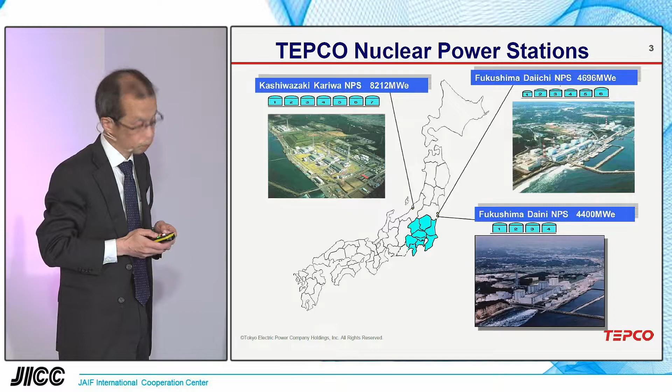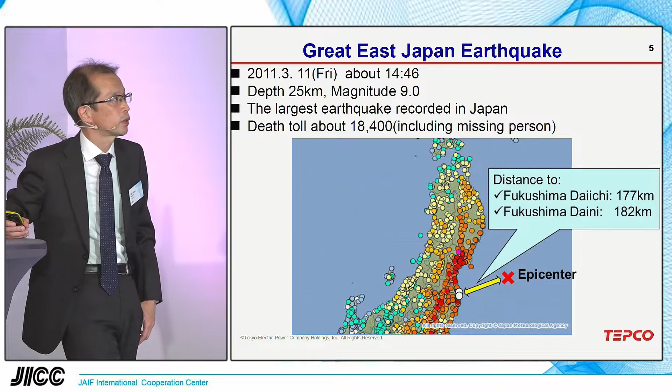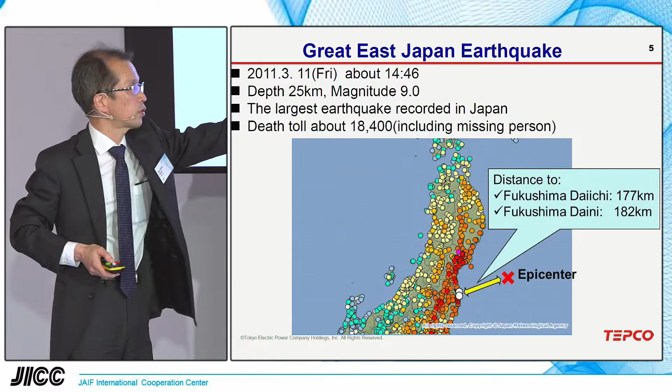And this is the earthquake information, which happened March 11, 2011. It was a very huge earthquake. The magnitude is 9.0, and we have never experienced something like that. And the death toll is right here. It's 18,400, including missing persons. But now the number has changed a little bit. It's around 19,000 or something. And this is the epicenter of the earthquake, and the distance to Fukushima Daiichi is 177 kilometers.

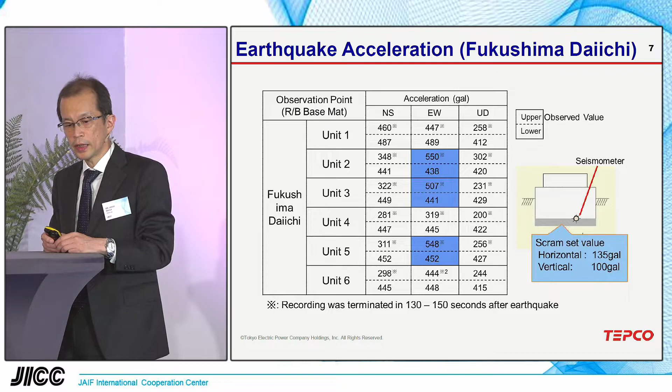Okay, so first I would like to talk about the impact caused by this earthquake. Some people say the Fukushima Daiichi accident was caused by the earthquake, but it's not really true. It was caused by the tsunami. I will prove it one by one right now. And this one shows the acceleration caused by that earthquake. At each level, we have two values in each cell. The upper side is the observed value, and the lower side is the design value. And if you take a look at those three areas, the observed value exceeds the design value, so it looks like a big deal.

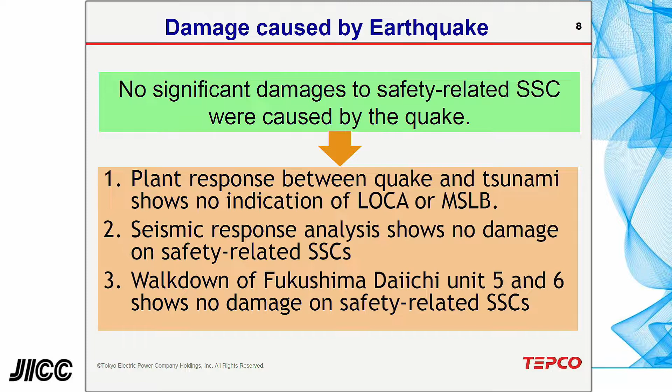And however, this is our position. No significant damage to the safety-related SSC, system, structure, and component, was caused by the earthquake. We have three reasons for that. The first one is the plant response between the earthquake and the tsunami shows no indication of any significant event, like a loss of coolant accident or main steam line break.

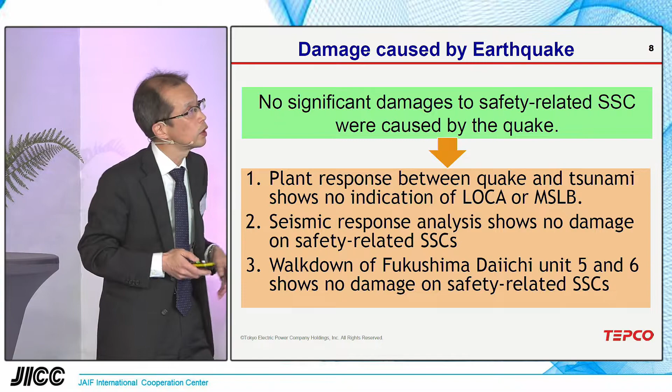And the second one is a seismic response analysis shows no damage on safety-related SSCs. The third one is a walk down of Fukushima Daiichi Unit 5 and 6 shows no damage on safety-related SSC. Why is it Unit 5 and 6? Because Unit 1 through 4 has been severely damaged, and because of the high radiation we cannot really go inside of it so easily. And I will show what we have found by that walk down.

And this is an example of seismic response analysis. We have picked up some of the Unit 1, 2, 3 safety-related systems, like here. On the left-hand side, we have the calculated value, where we have the input of the actual seismic acceleration into the system, and we get the result. On the right-hand side, you see the assessment criteria value. And as you can see, in all areas, at least for this estimate, the assessment criteria value is more than the calculated value.

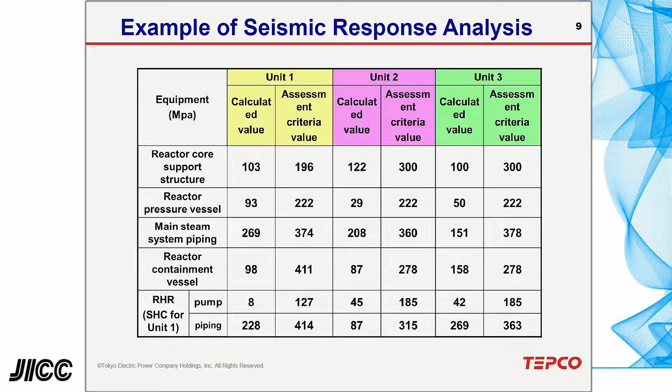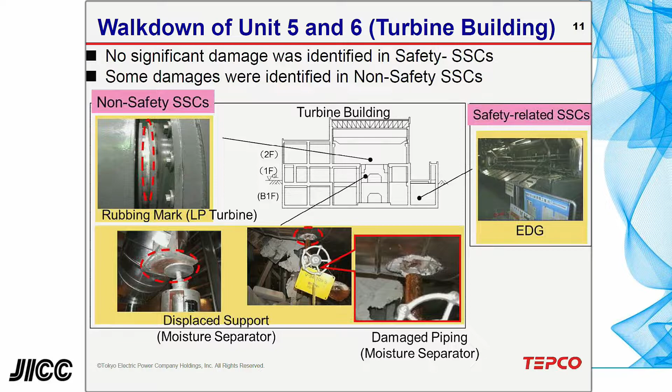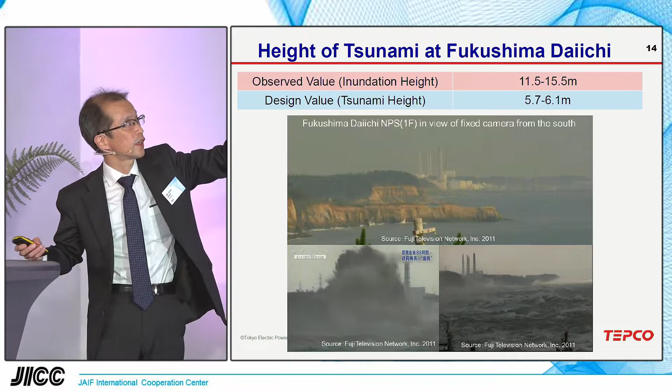Please be careful, this 11.5 to 15.5 meters is not really the height of the tsunami, because we have a tsunami height meter offshore, but it went over scale. We do not have the exact value of the height of the tsunami. This was the inundation height. If you have flooding on your site, you will see the mark on the outer wall of the reactor building or turbine building. So this is the inundation height, the flooded height, I would say.

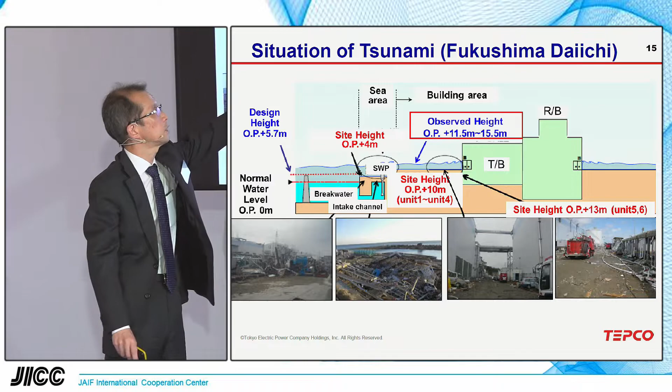So this is how the tsunami caused damage. You can see the seawater pump has been completely damaged because it is located very close to the seashore area. And also, this is a sectional diagram. As you can see, all the site, even the backside of the reactor building, has been completely flooded. So as I explained, 11.5 to 15.5 meters is this height. It's not really the actual height of the tsunami, but again, the inundation height.

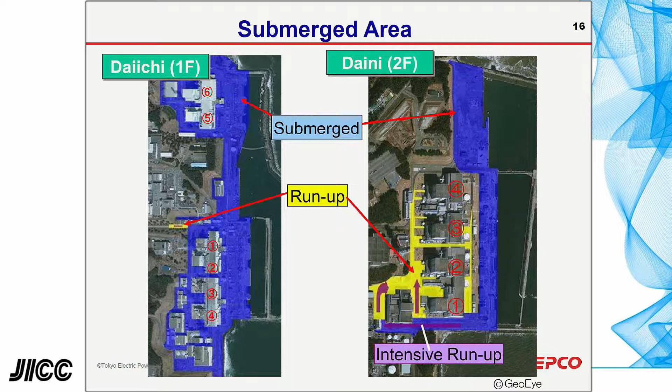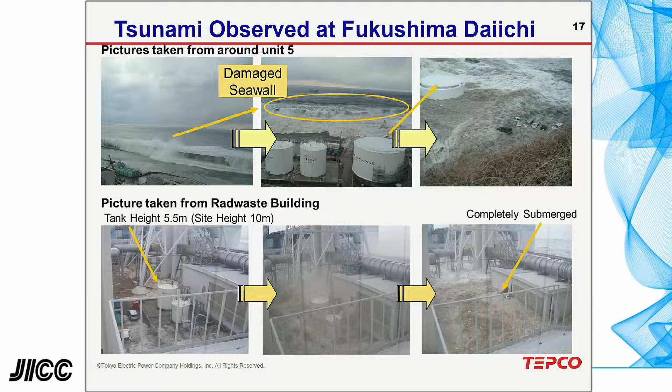Okay, this is another picture showing how the tsunami attacked our site, and you can see the seawall has been damaged and overflooded. And this is an interesting picture, taken from the Radwaste building in a high elevation area. The site elevation is 10 meters. And the height of this tank is 5.5 meters. So as you can see on the right-hand side picture, it has been completely submerged. So that means we have experienced at least 15.5 meters inundation.

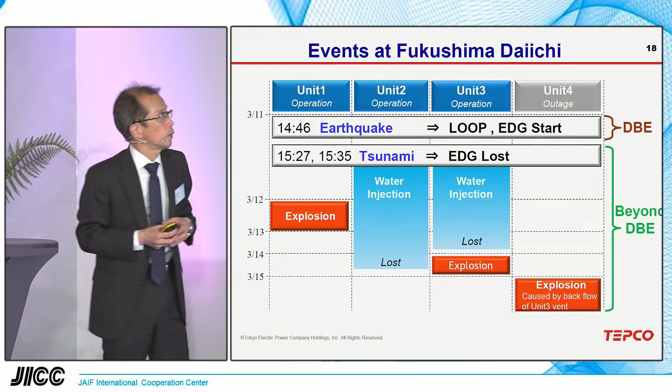And I will explain more detail later. The first critical event was the hydrogen explosion of Unit 1, just within 24 hours since we had the tsunami. And this explosion made accident management quite difficult because of the scattered debris. And also, at Units 3 and 4, we had explosions. And also at Unit 2, we lost the water injection.

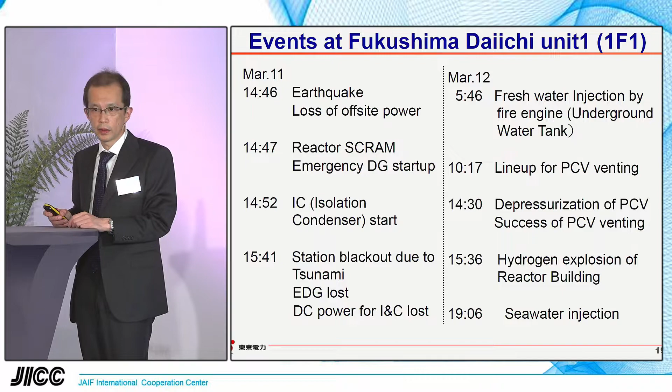Then we realized that the PCV, primary containment vessel, pressure had been elevated. So we were trying to line up PCV venting to protect the integrity of the containment system. Then after 4.5 hours, we recognized there was a depressurization of the primary containment system. That means success of the PCV venting. But right after that, just 1 hour after, we saw the hydrogen explosion at the reactor building.

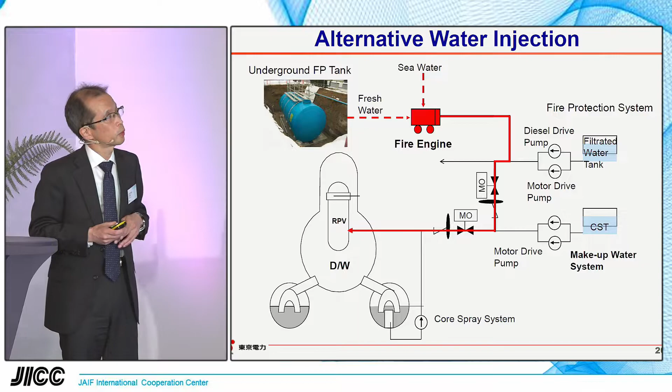So this is the water injection. We improvised this action. Usually if something happens, you have the ECCS, you have the pump, and you have the water sources. But this time, it's not available because we do not have power. So what we relied on is a fire engine, this car. This is basically for fire events, but we improvised with it. We connected the underground fire protection tank to the fire engine, and then tried to put the water in this existing line.

But considering the amount of water we have lost from the inside of the RPV, the amount is not enough. The volume is not really enough for this operation.

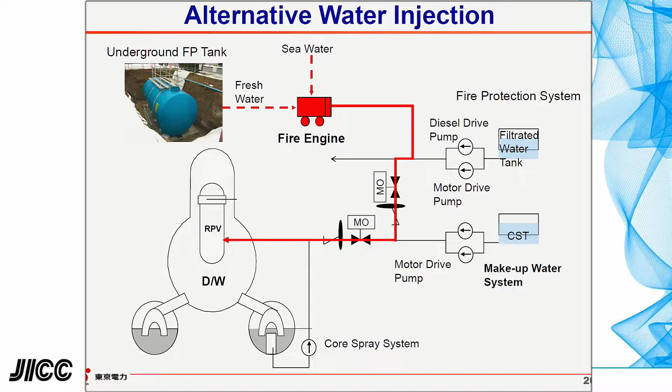And this one is for the PCV venting. We realized the internal pressure of the primary containment vessel is elevating. And if it is left unattended, it may rupture. I mean, it may lose the integrity of the containment. So that will lead to a catastrophe. So we tried to conduct the PCV venting operation.

Why are we doing this? Because if we could successfully make this line available, we have a significant amount of water in the suppression pool. So you can scrub the vented gas through this water. So some of the radioactivity, especially the particulate material, can be reduced through this water. At the same time, by depressurizing with this operation, we can still protect the integrity of the primary containment vessel.

However, we had difficulty because usually these two valves are closed. Under the normal situation, we can operate them from the main control room, a very quick action. But at that time, it was not available because the power was lost. So we sent a pair of operators into the field to try to open the valve manually. The first two operators were actually the shift supervisor and relatively senior people, because we could not let the young people go in the field since we had little knowledge about the radiation level there. So we sent two people, and they came back and successfully opened the valve.

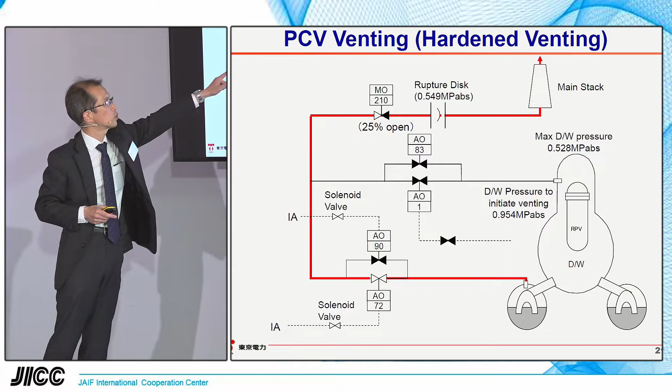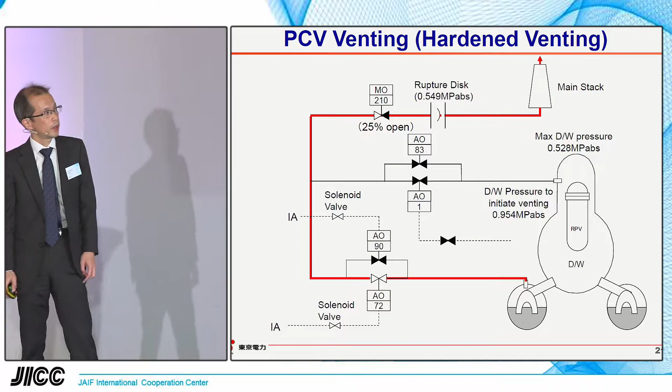So we changed the strategy. We installed an air cylinder outside of the reactor building and connected it to this one. So we could successfully open this valve from outside the reactor building. Then we realized the pressure had decreased inside the primary containment vessel, and we recognized that this operation had been successful. However, a hydrogen explosion occurred at that time.

This schematic shows how the hydrogen explosion occurred. On the surface of the PCV, we have numerous penetrations like electric cables, and also the equipment hatch. They are usually sealed by special material, but the sealing capability was compromised because of high temperature. The hydrogen was generated inside the RPV and leaked out of the PCV, and hydrogen is very light, so it naturally goes up to the high elevation. So it accumulated on top of the reactor building operating floor, and finally it exploded.

Excuse me. Yes. Can you show by hand, because the laser is not visible on the screen? Oh, really? Okay, I'll try. Thank you.

Okay, those are the penetrations, and this is the equipment hatch. If the hydrogen leaks out like this, it will come up like this. The top floor of the reactor building is called the operating floor or refueling floor, and a significant amount of hydrogen accumulated there, and it ended up with the hydrogen explosion.

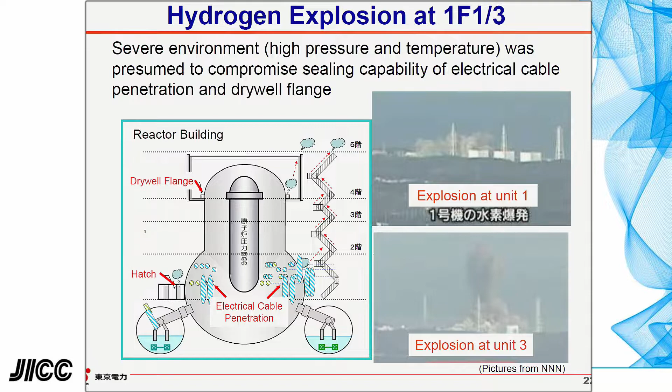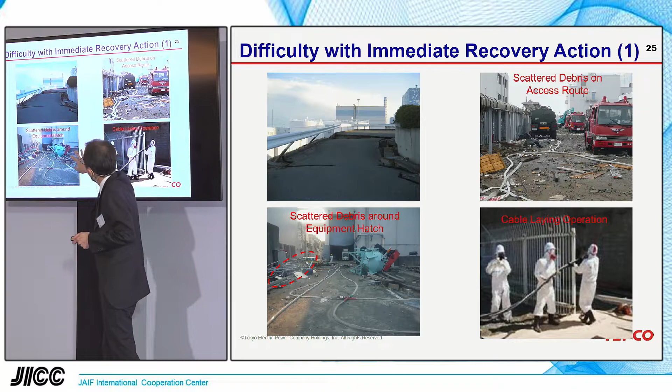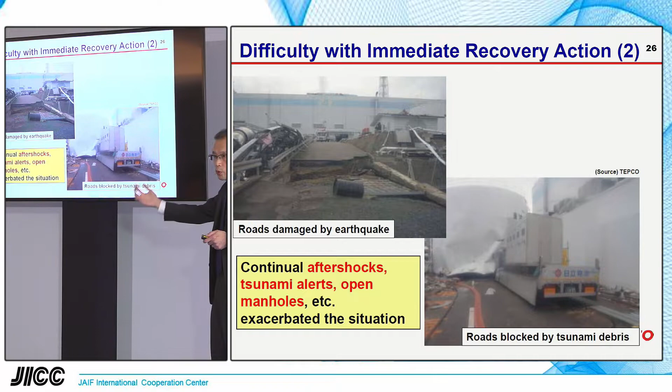There's another picture. You can see this one. This big tank completely blocked the access road. It has been swept away from the seashore area to near the power plant because of the tsunami.

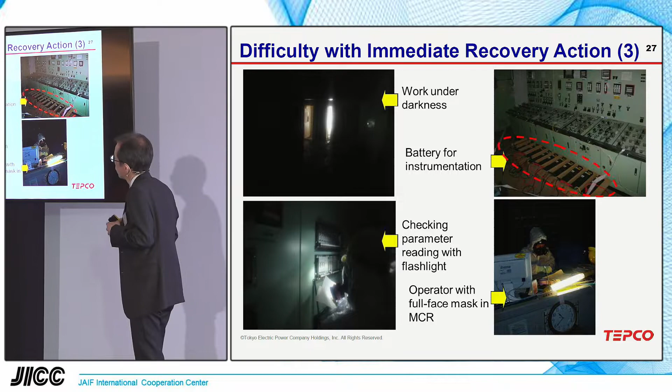So this one shows how difficult it was to understand the situation of the plant in terms of the operators. Right after the tsunami attack, the main control room became completely dark. There was no light. The only light we could rely on was a flashlight, which is equipped in the main control room. So they had difficulty working in the darkness, trying to read some of the parameters, like the water level and the pressure level, by using the flashlight. Because we had lost almost all the power, we could not really read the parameters in the main control room. So we brought in some batteries to connect so that we could see the readings.

And this one shows the operator with a full face mask in the main control room. Of course, operators are very accustomed to wearing the full face mask in the field, but not in the main control room.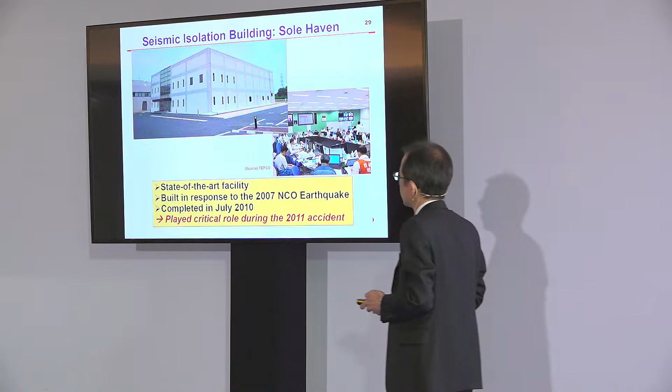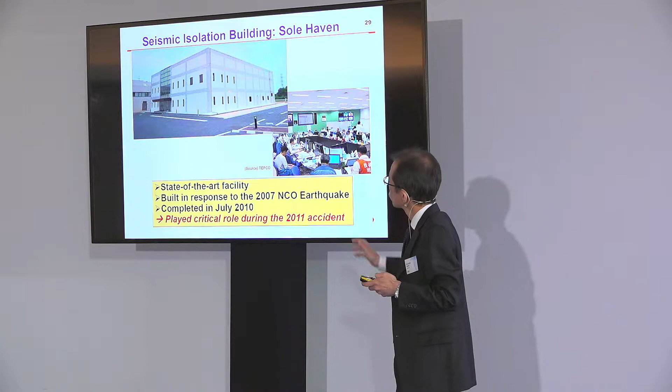So from the lessons learned, we constructed this seismic isolation building, first in Kashiwazaki-Kariwa, which had been directly attacked by the earthquake in 2007. Then we extended our effort to Fukushima Daiichi. So if it had not been for this building, the accident management at the time in Fukushima would have been much more difficult.

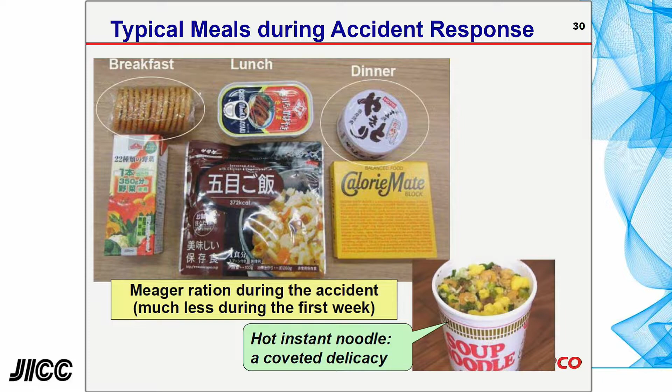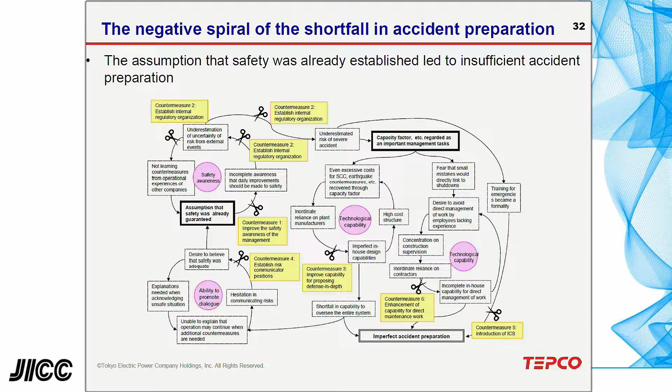We have given so much consideration to earthquakes, but not to tsunami, because everybody knows what is the most important natural hazard. What is that? I think almost all Japanese would answer, it's the earthquake. So from the beginning of the nuclear power introduction, we have given a lot of conservatism, or in other words, safety margin, in every step of the design of our systems, but not for tsunami.

And also, we could not really learn from international operating experience. There was a flooding event, at least we know that there were two, in a French power station, and we had the operational experience data at hand, but we could not really make the best of that operational experience.

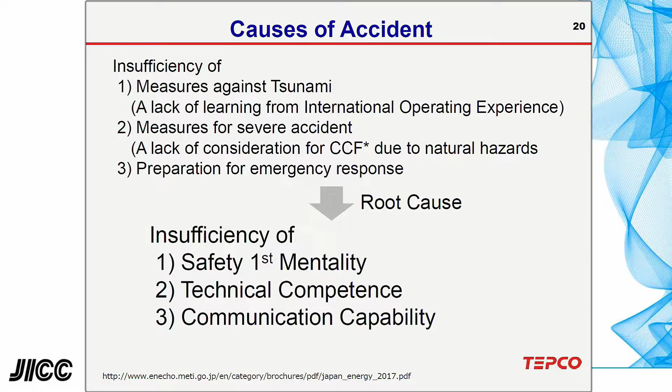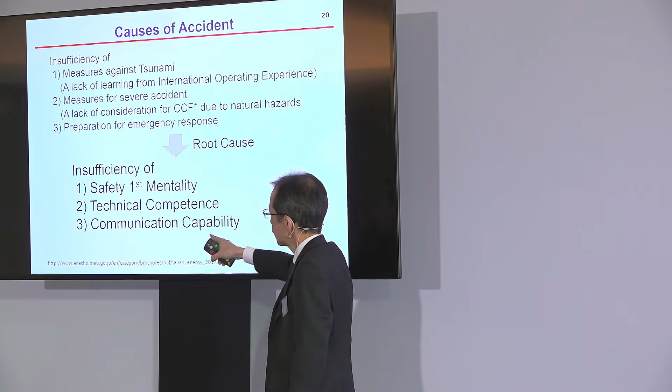So we have analyzed those 3 issues and come up with 3 root causes: first, the insufficiency of the safety first mentality, then technical competence, and the third one is communication capability. And before I go into the detail about each item, I'd like to talk about the redefinition of the vision and mission.

Right after the Fukushima accident, many engineers left TEPCO. They quit their jobs because they could not really see a bright future in TEPCO and nuclear power. So we had to redefine our vision and mission.

So, to keep the Fukushima nuclear accident firmly in mind, we should be safer today than we were yesterday, and safer tomorrow than today. We are committed to become the nuclear power plant operator that keeps creating unparalleled safety. This is our vision. We have 2,700 people in our division, and if you ask any one of them what is your vision, probably some of them cannot recite it as it is, but they can say something like this.

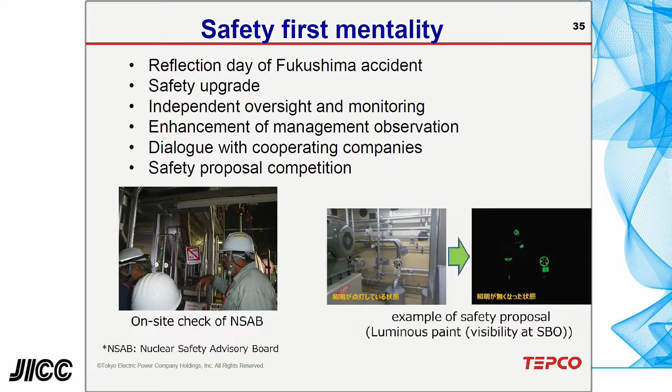As you can see, this is the valve. We have put luminous paint on there. Even if we have complete darkness, we can access this area and easily find out which valve to open. This is, I think, a good idea. We try to continue this effort.

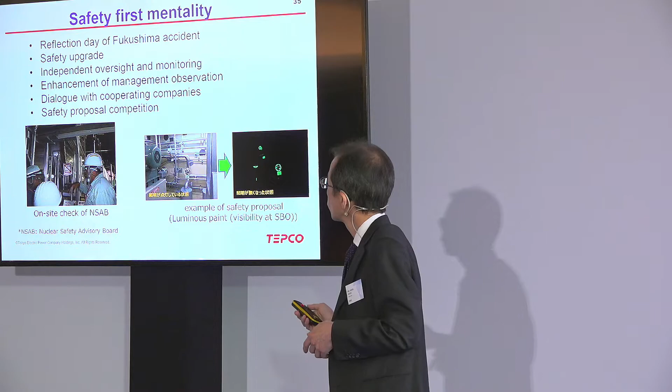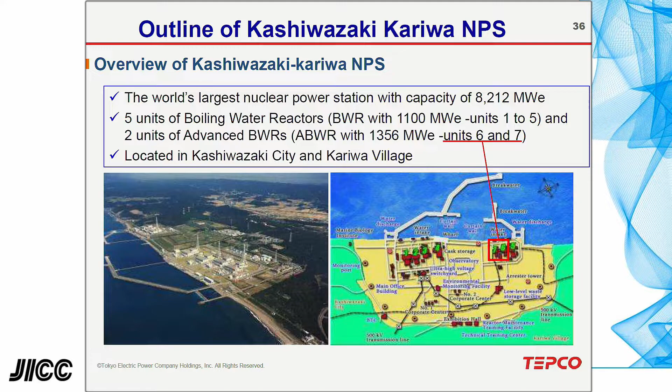And from now on, I would like to explain a little bit about the safety upgrade work conducted for Kashiwazaki-Kariwa. Again, we have 7 units, and 1 through 4 are a little bit far away from units 5, 6, 7. Units 6 and 7 we are trying to restart first. It's still in the middle of the restart activity; we have not restarted yet. Units 6 and 7, in terms of output, are larger than units 1 through 5. And also the reactor types are a bit different. This is the advanced type of BWR.

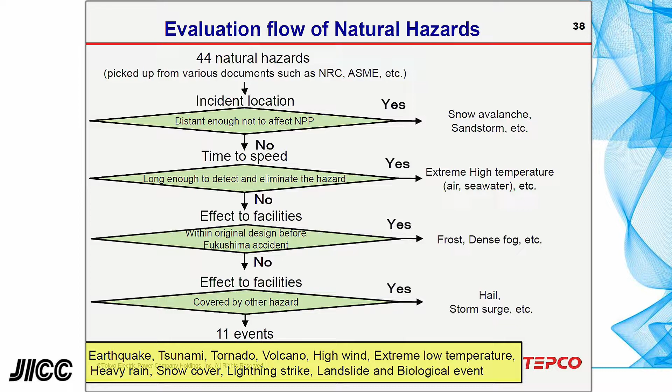What we have done is, first, we have learned a severe lesson, and we first took a look at natural hazards. What kind of natural hazards do we have to consider? We picked up 44 natural hazards from various documents, and we have screened out some of them. For example, in the Kashiwazaki area we have a lot of snow, so snow is a very important consideration. However, we do not have high mountains around the Kashiwazaki-Kariwa area, so we could eliminate the possibility of snow avalanche. After that, 11 events were picked up, so that we have to consider the effect of those natural events on our site.

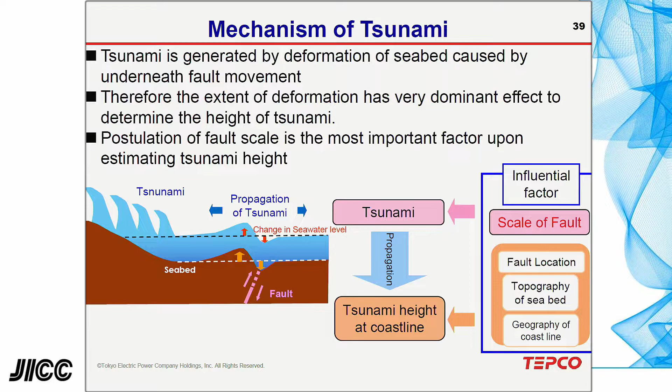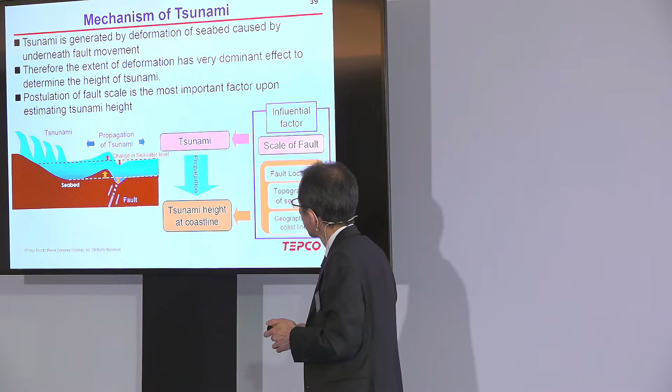This is a simplified diagram for that. And there are 3 influential factors right here: the scale of fault location, the topography of the seabed, and also the geography of the coastline. So based on the new findings, we formulated a design basis tsunami.

Because basically the natural hazard is, how can I say, an act of God, force majeure. Of course, we will make a best effort by collecting the past data and try to reflect on what we are doing right now, but still, there is a chance the actual natural hazard can go beyond our expectation or assumption.

And this is the result for the design basis tsunami. It used to be just 3.3 meters for the Kashiwazaki-Kariwa area. Based on our new findings, it has been elevated to 6 meters, and the run-up height is 8.5 meters. This is the original site elevation for units 6 and 7. It is 12 meters above sea level.

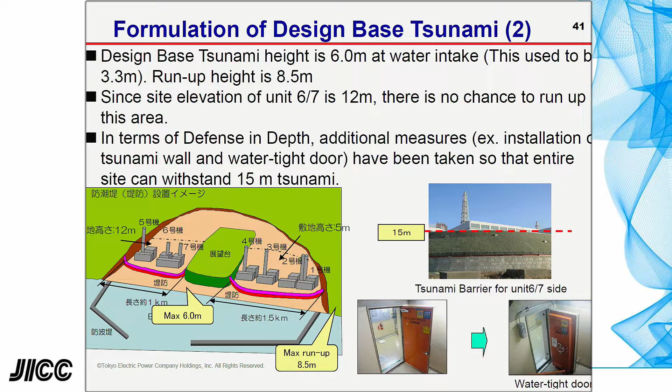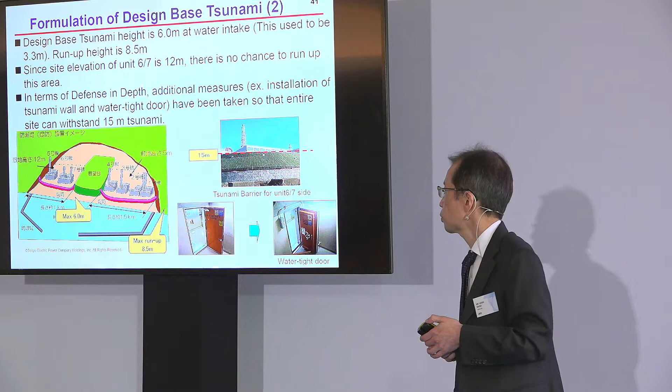And we have added an additional 3 meters of embankment. This is because we would like to be on the safe side against any natural event, especially the tsunami. On top of that, this is a different tsunami wall. From units 1 through 4, the site elevation is a little bit lower, 5 meters. So we have the same idea. We're going to protect our site up to 15 meters. So we built this tsunami wall, made of concrete, 10 meters high.

But this is not the end of the story. In case something happens and this has been flooded, we could protect our reactor building by using the tsunami wall and a tsunami plate. And if it has been flooded, inside the reactor building where we have safety-important components, we have installed watertight doors like this. And still, if flooded, we have a draining system, a pump-up system. The water can be pumped from the room to the outside area.

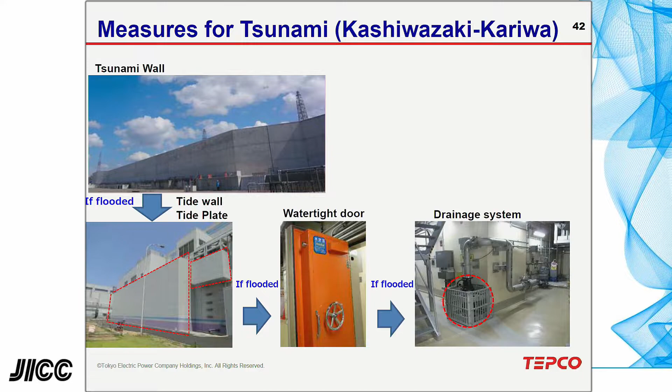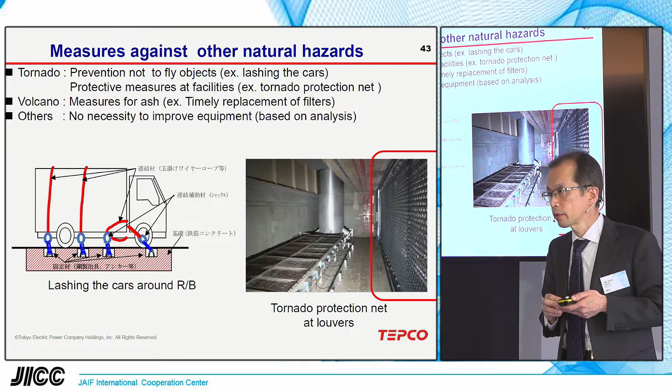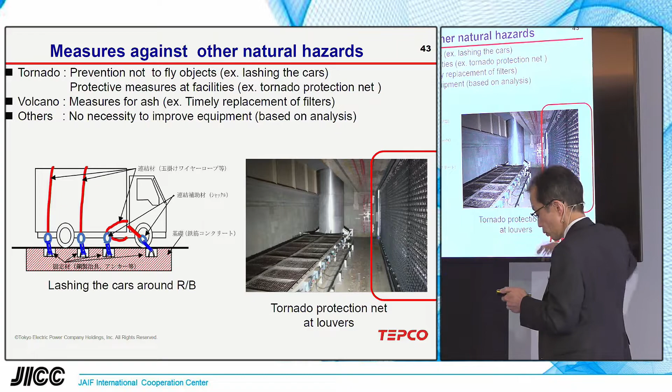And this is another consideration against natural events. For example, this is for the tornado. If we recognize there may be a chance of a tornado, we are supposed to tie down vehicles so that we can prevent them from becoming flying objects and damaging the safety system of the plant. And also we have put protection nets on the safety system. So this is another picture of what we have done.

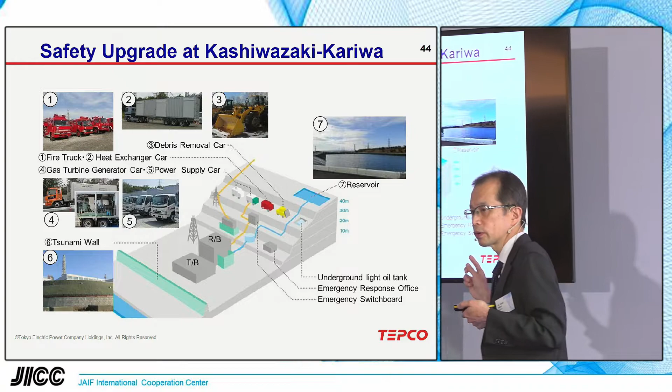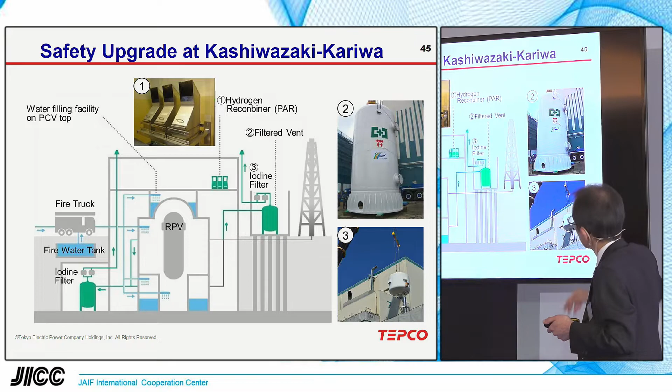The important thing is just having those vehicles is not really enough. The important thing is that our own people, TEPCO's people, can handle it. This is the most important. Okay, this is another safety upgrade at Kashiwazaki-Kariwa. We have installed hydrogen recombiners inside the reactor building, especially on the refueling floor, because that is a place the hydrogen can come up to. And, as I will explain later, a filtered venting system has also been installed.

And again, just installing a new system is not really enough. The important thing is that you have to do it on your own. You have to handle what you have installed. So we are now conducting emergency response training on a regular basis. Before Fukushima, emergency response training was more of a ceremony than actual training. But it's not like that now; it is business as usual.

So all the newly equipped material like the gas turbine generator and fire engine, we make our own people operate in full-fledged fashion. And also sometimes the simulator training is conducted with a limited amount of light so that you can handle the situation in the darkness.

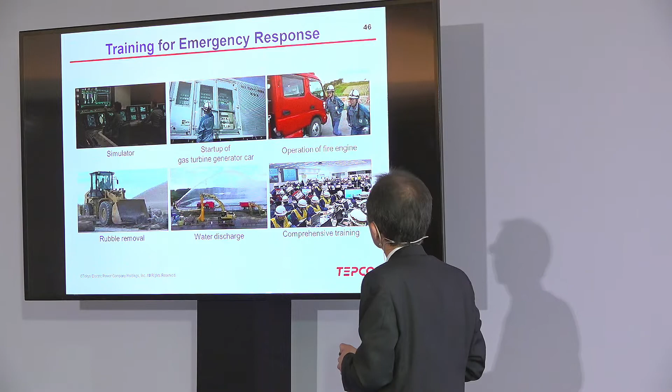Okay, I'd like to move to the second part of that. That's technical competence. What do you mean by that? What we are doing right now is do-it-yourself. Because before Fukushima, let's say we were going to install a new system at our existing site, what we usually did was just pick up the telephone and call the vendor, like Hitachi or Toshiba: we are thinking about this system, why don't you bring us the schematics and some related documents?

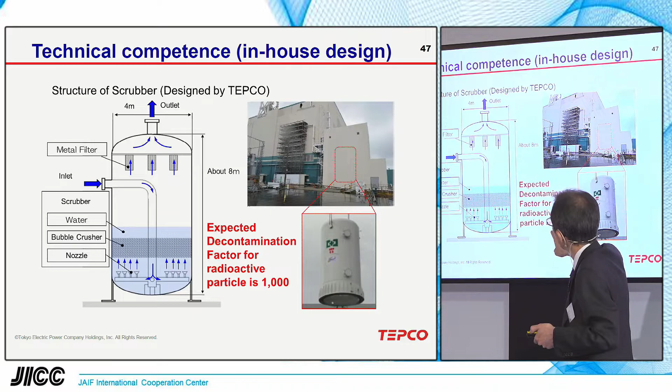Of course, it's an easier way, but with heavy reliance on the vendor, you probably don't understand how the systems work at your plant. So right now, we are trying to enhance in-house design, and this has almost already been installed: a filtered venting system. The vented gas comes here, and after scrubbing in this area, it goes into the environment. We expect the decontamination factor for radioactive particles to be 1,000. This has been designed by TEPCO and manufactured by new guys. New guys means they have never done work associated with nuclear power. We would like to enlarge our area of in-house design.

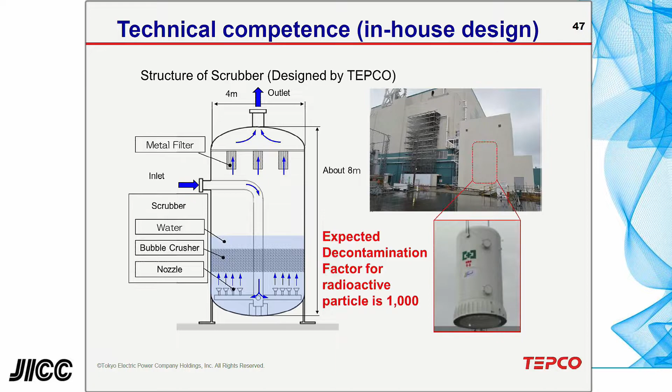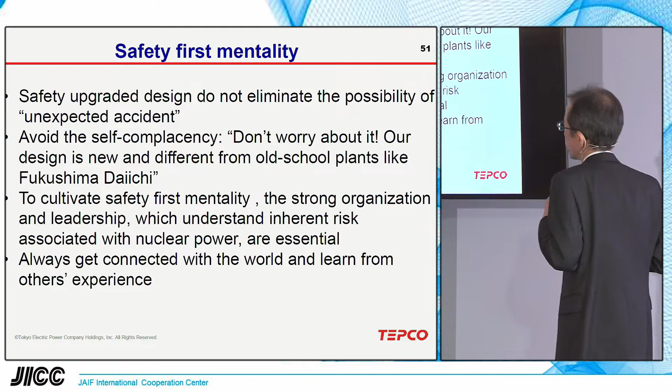For a safety-first mentality, you have to keep in mind that a safety-upgraded design does not really eliminate the possibility of an unexpected accident. Even if you have an advanced design, you cannot really eliminate the possibility. And you have to avoid self-complacency or overconfidence. Self-complacency and overconfidence are, of course, the root cause of the Fukushima Daiichi accident. I thought that our plant was very safe. Looking back on my personal history, what we did was enhance our plant in terms of economy, not in terms of safety. So, don't worry about it, our design is new and different from an old-school reactor like Fukushima Daiichi? Oh, never do that, please.

To cultivate a safety-first mentality, strong organization and leadership which understand the inherent risk associated with nuclear power are pretty much important. And always get connected with the world and learn from others' experience. As I explained, we had full knowledge of the flooding event which occurred in France. Let me pick up another example. There was a document called B5B, compiled by the NRC. Basically, the main purpose of B5B is how to cope with a terrorist attack. But inside, the document is not so complicated. It provides mobile equipment, water sources, and also how to recover power.

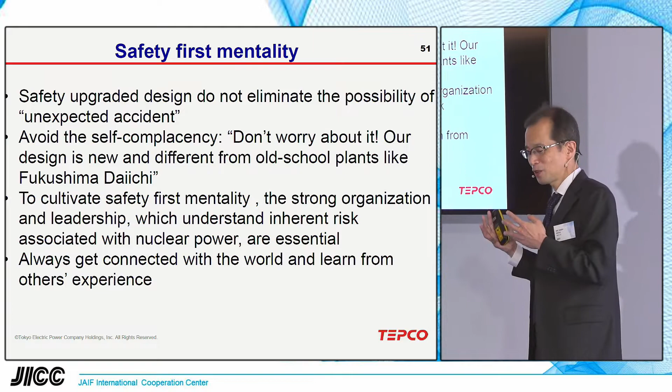In the United States, we have a local branch, the Washington office of TEPCO, and many people visited the United States and sometimes met with NRC officials, but we could not really learn from the B5B document.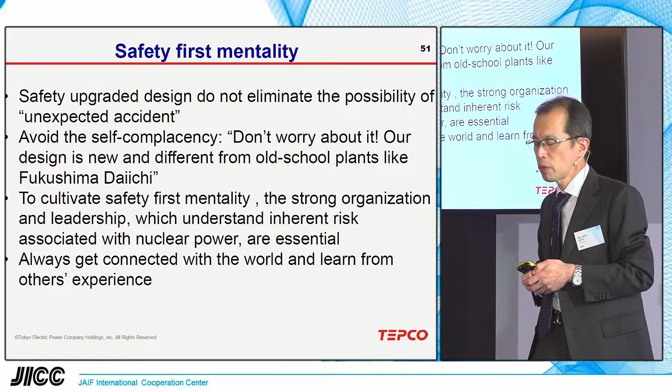If we know that B5B document, it's not really significant investment. Just buying mobile equipment is not really expensive. Building such a huge tsunami wall could be very, very expensive, but having some of the portable equipment is not significant investment.

Okay, the technical competence. Don't let nuclear power be black box technology. At the initial stage of your nuclear power introduction, probably your knowledge and your experience is pretty much limited compared to that of the vendor. But try to catch up to them and gradually gain the technical competence. That means you have to invest in human resources.

And again, you have no idea of the extent of the natural hazard. So under this extreme situation, the usual procedure does not really work. So what is our last hope? The last hope is knowledge and experience of the operator with deep understanding of the principle and the design. And also keep an eye open to what is going on in the field. So in other words, you'd better spend more time in the field, not in the office, because everything is going to happen in the field.

Okay, this is my last slide. This is communication capability. Again, nuclear industry is based upon the trust and the understanding of the local community. Why is that? Because once an accident occurs, they are the primary victims. They have to evacuate, they have to leave their home, and sometimes they lose the connection with their hometown. So they are the primary victims. We have proven that. We know that. And so you have to take extra caution, extra care to have a very good relationship with the local people and let the people understand what we are doing right now.

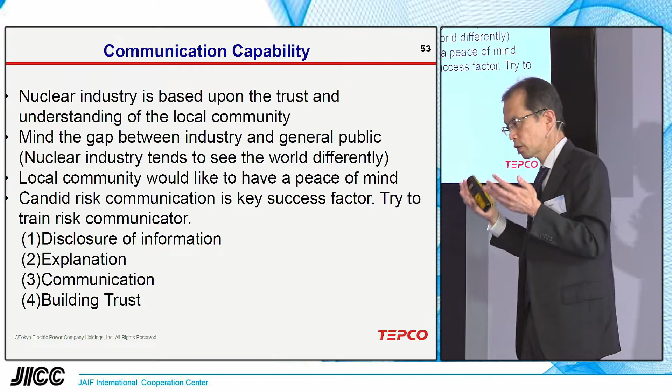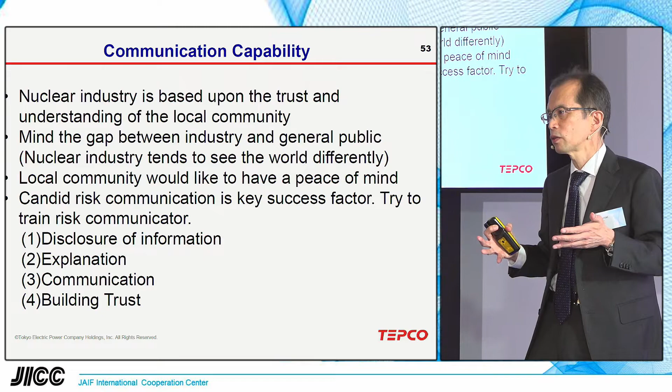And mind the gap between the industry and the general public is also very important. From the industry's point of view, we have a bunch of safety engineers. Okay, we are safe. I think our power plant is safe because our PRA result is something like this. But that's not really enough to gain the trust of local people, because local people would like to have peace of mind. Having peace of mind is different from assuming the plant is safe. And how are we going to do this? There is actually no magic formula, but risk communication is one of the keys, I guess.

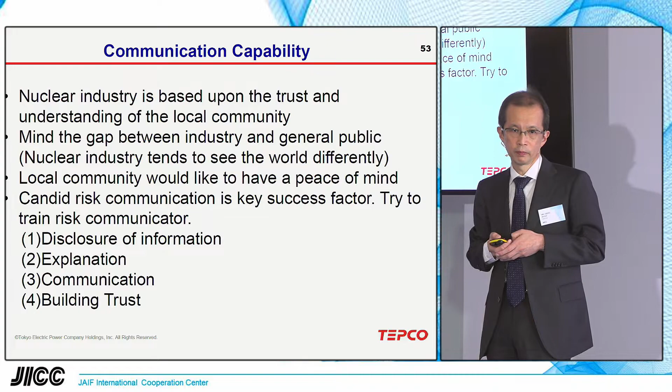We appointed almost 10 people as professional risk communicators and gave them special training. The main function of the risk communicator is not to persuade the people our plant is safe. This is not their mission. Our expectation for the risk communicator is to listen to people and sympathize with the worry, concern, or whatever they may have.

And usually there are 4 steps for risk communication. The first is the disclosure of information. What is the nature of the trouble? What is your plant status? We're not going to hide anything. We'll be completely transparent. Then we will explain. Explanation is not just one way. It has to be both ways. We have to listen to the local people, and also the communication. Then by repeating this cycle, we can finally, hopefully, build that trust.

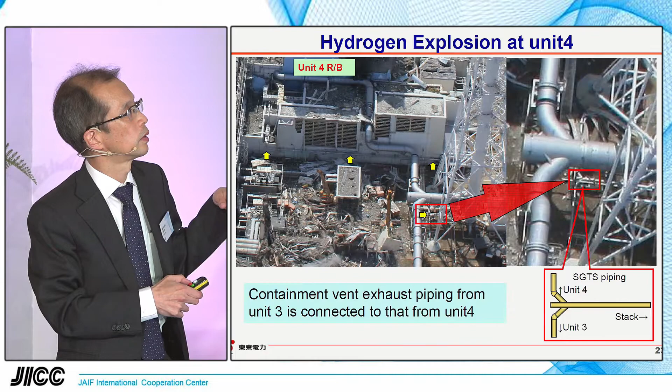I'd like to go back to the timeline for Unit 1. Oh, it's all the way. It's all the way. Okay, and right here, okay, isolation condenser system.

Those of you who may not be familiar with that system, the isolation condenser is like a very big shell, located on the 4th floor of the reactor building, and steam comes inside the isolation condenser, and it is surrounded by a significant amount of water. And without doing anything, we can cool the reactor for 8 hours. See?

And this isolation condenser started. And the isolation condenser has pretty high capability. It can cool the reactor at 8% of full capacity. And that means once this system is in service, a reactor can be very quickly cooled down. And this is one of the main good things about it.

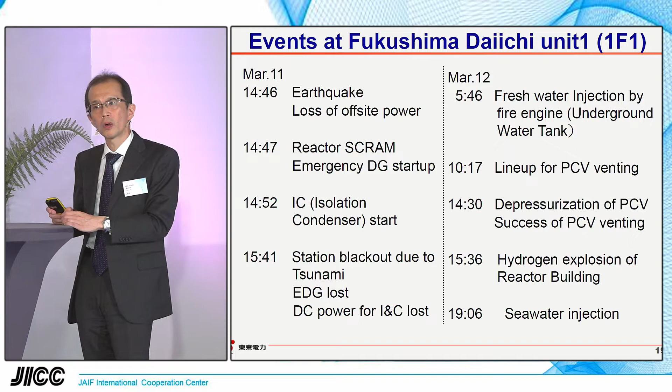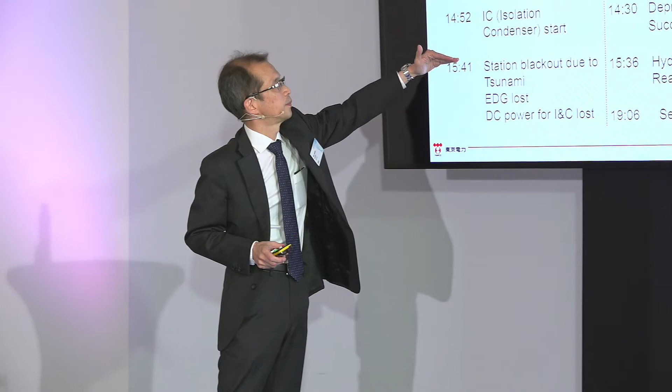However, at that time, operators thought it was cooling down too quickly, so they worried, and they sometimes opened the valve and closed the valve to make sure there was not too much drop in the reactor coolant temperature. And why is that? Because up here, after the earthquake and up to the station blackout, this is basically within the design-basis event.

I don't really think, therefore, the operator at that time could predict there would be a total loss of power. I think that is our position. So in hindsight, if the operator had a very special ability, they could probably foresee the tsunami, and that this may lead to the severe accident, so whatever the drop of the reactor water temperature, we will leave it there. If it is your hindsight, it may be correct.

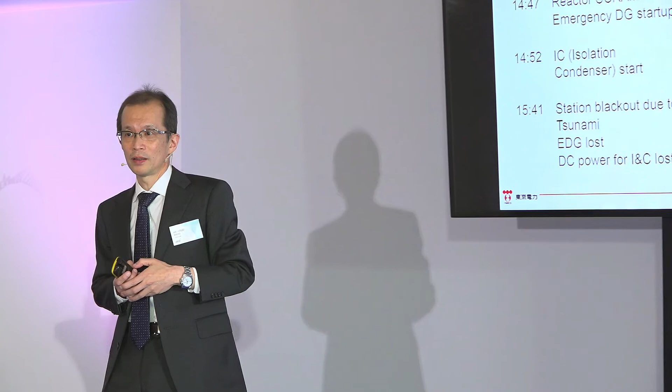But at that time, again, when the isolation condenser started, it was within the design-basis event. Did I understand you? Did I answer your question correctly? More or less. Okay.

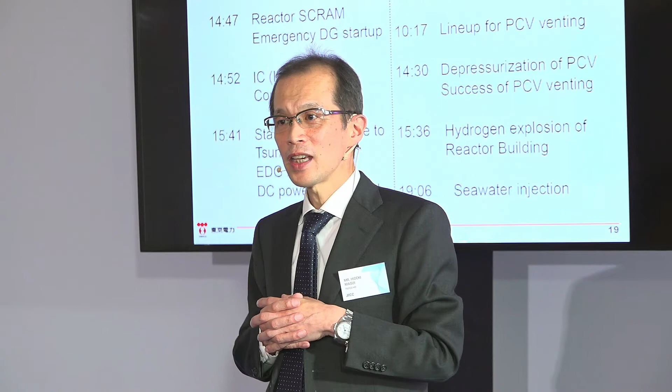And also, there is a discussion, but this is not the end of the story. Because the isolation condenser, as I explained, only Fukushima Daiichi Unit 1 has it. No other reactor of ours has it. So, no, I'm just talking about TEPCO's point. Okay, it has been pointed out that there is another reactor owned and operated by JAPC, Japan Atomic Power Company. They have Tsuruga Unit 1, and it has the isolation condenser.

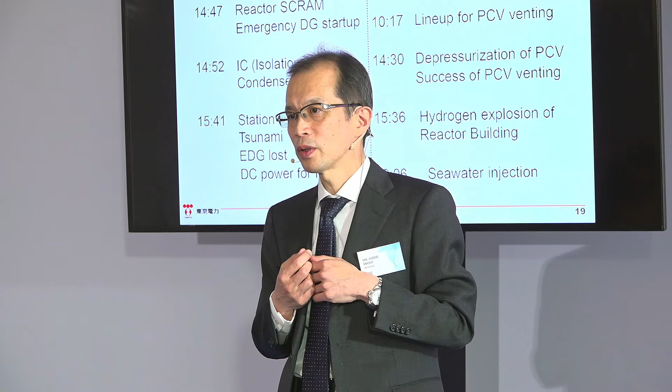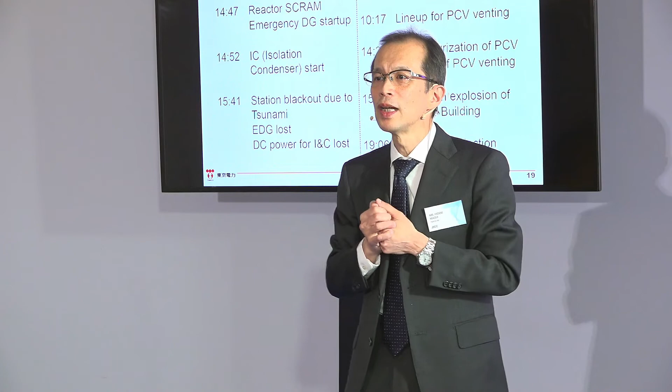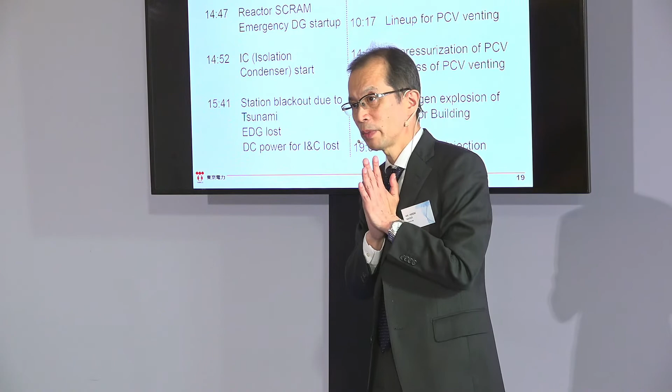The system is also the same. But JAPC's people conduct the surveillance, so they know how the system works. On the other hand, TEPCO's operators have never conducted any surveillance on it. Because once the isolation condenser is activated, a huge amount of steam comes outside of the reactor building. So if you had conducted that surveillance on the isolation condenser, you would probably know that your system is working. But that's not the case for our Fukushima Daiichi Unit 1.

So what I'm saying is, of course, there is some lesson. But at that time, before the tsunami came, the operators were closing the valve and opening the valve and trying to make things work intermittently. I don't really think there is anything to blame. That is my point.

Probably you are a little bit unsatisfied, but okay. If it would have opened, there would not. Yeah, that's right. Okay, it just happened that the tsunami attacked after the operator closed the valve. The operation is open and close, and they repeated this operation several times. If the tsunami came while the valve was open, maybe the story could be different.

Thank you. Are there any questions? Yeah, I have a question. What are the reasons why in the project you have a diesel generator on the ground floor? If you have quite a big tsunami risk in your region, why did your regulator accept this project?